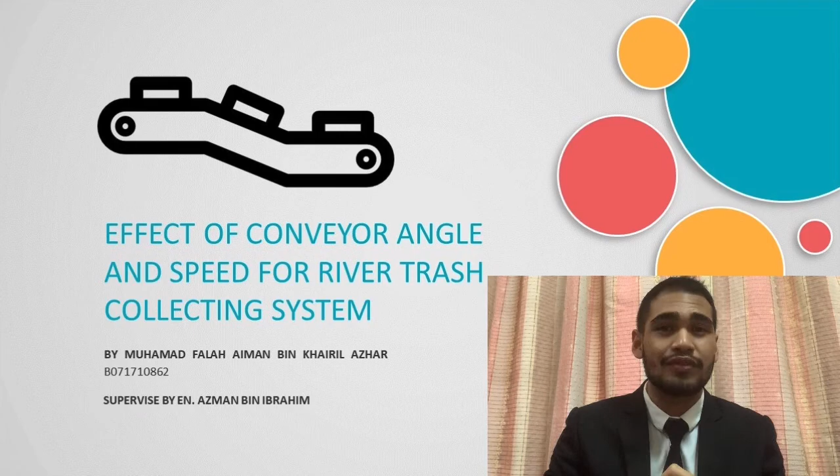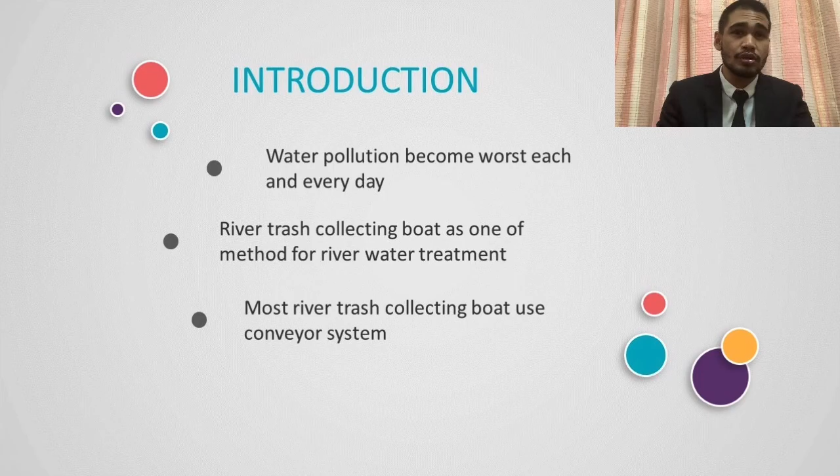I want to present my bachelor degree project entitled Effect of Conveyor Angle and Speed for River Trash Collecting System. As we know, water pollution becomes worse each and every day. So, in order to clean the water, the river trash collecting boat is used as one of the treatments for river cleaning. Most trash collecting boats use a conveyor system.

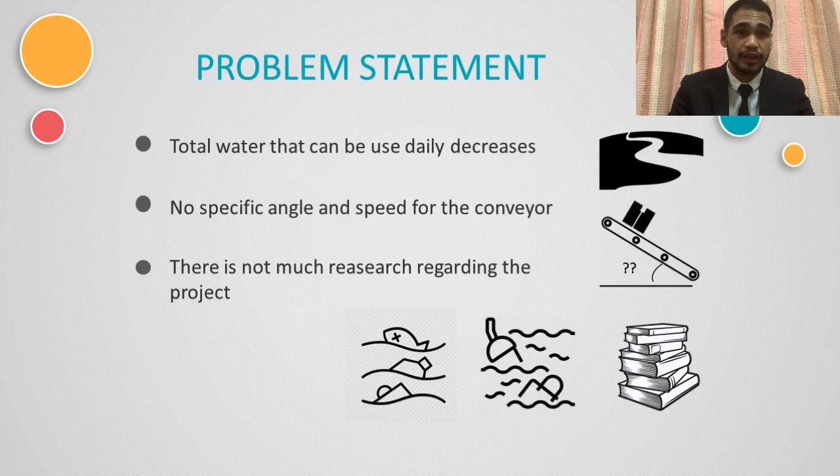My problem statement here is, there is no specific angle and speed of the conveyor used by river trash collecting boats. So, my objectives of study are to study the effect of conveyor angle and speed on the efficiency of collecting floating trash, to determine the specific angle and speed of the conveyor system in order to increase the efficiency of the system, and to design a conveyor system for river trash collecting.

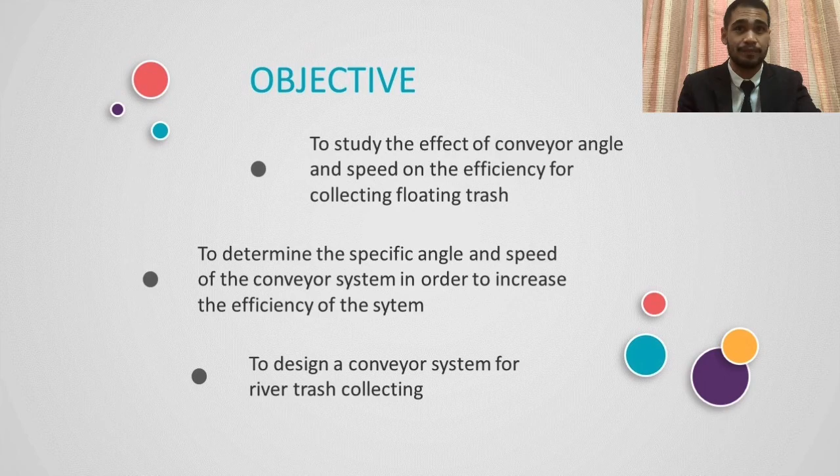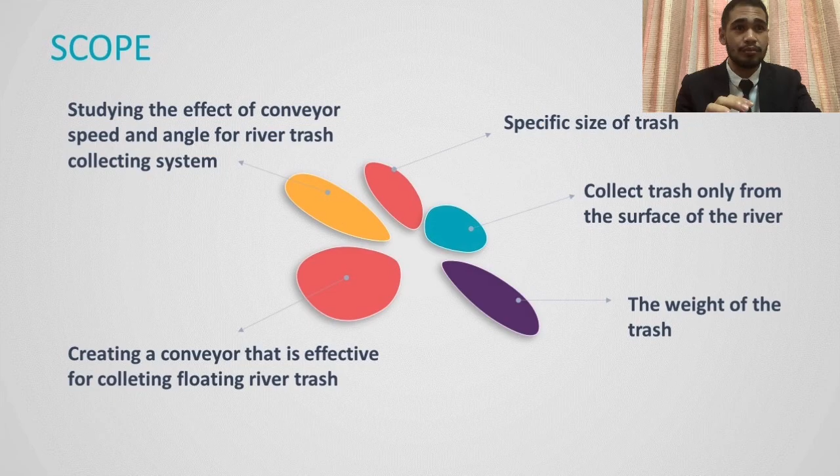My scope covers studying the effect of conveyor speed and angle for the river trash collecting system, creating a conveyor that is effective for collecting floating river trash, the specific size of the trash, collecting trash only from the surface of the river, and the weight of the trash.

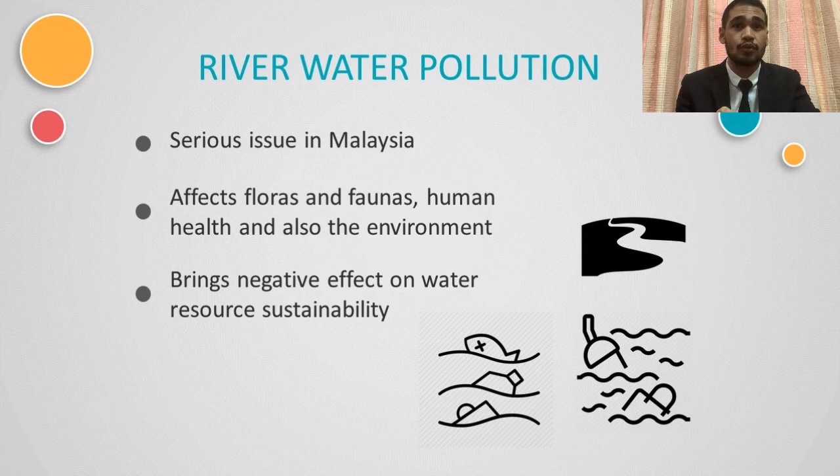For the literature review, river water pollution is a serious issue in Malaysia. It affects flora and fauna, human health and also the environment. It also brings negative effects on water resource sustainability. There are many current technologies for river trash collecting, such as the Water Witch Buddy catamaran, the trash wheel, the mud trash cat and the famous Interceptor.

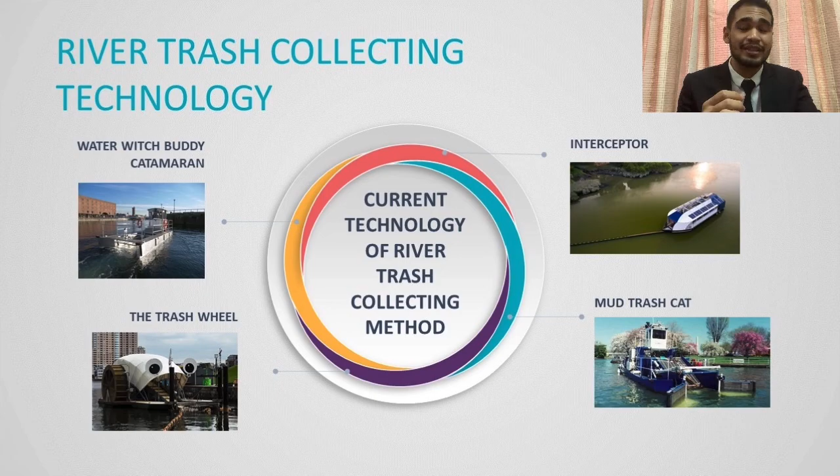Most river trash collecting boats use a conveyor. A conveyor is a mechanical component assembly that allows men to transport objects with minimal effort. It consists of a frame that supports the roller, wheel or belt from one destination to another. It is usually powered by a motor, gravitational force or manually according to the application.

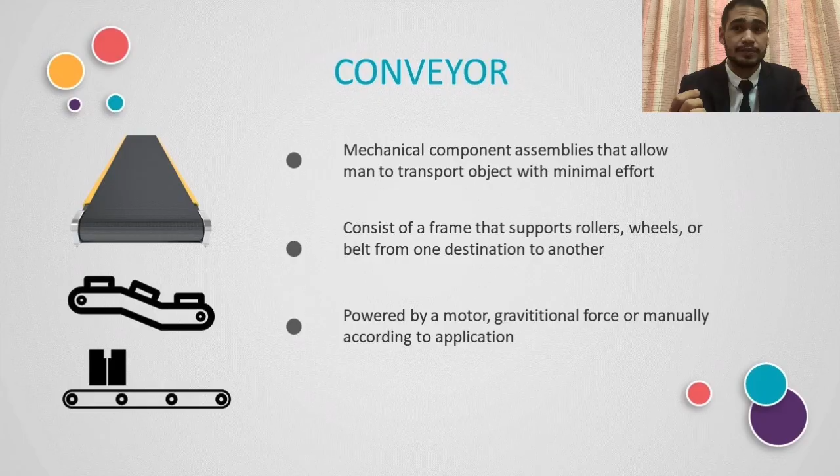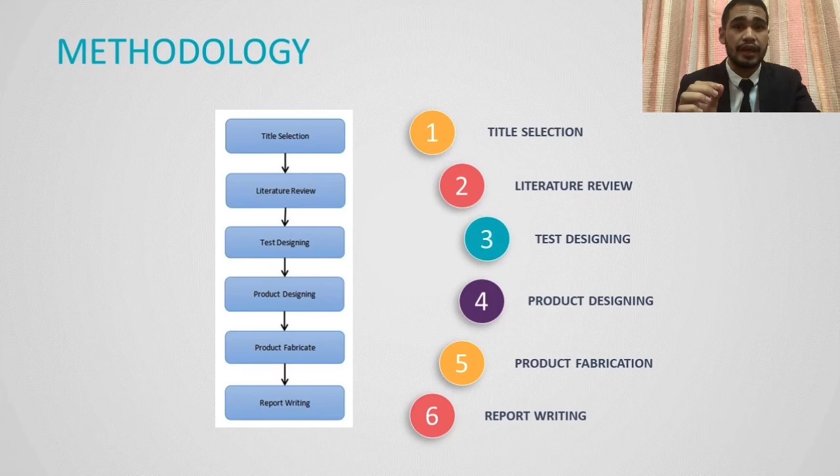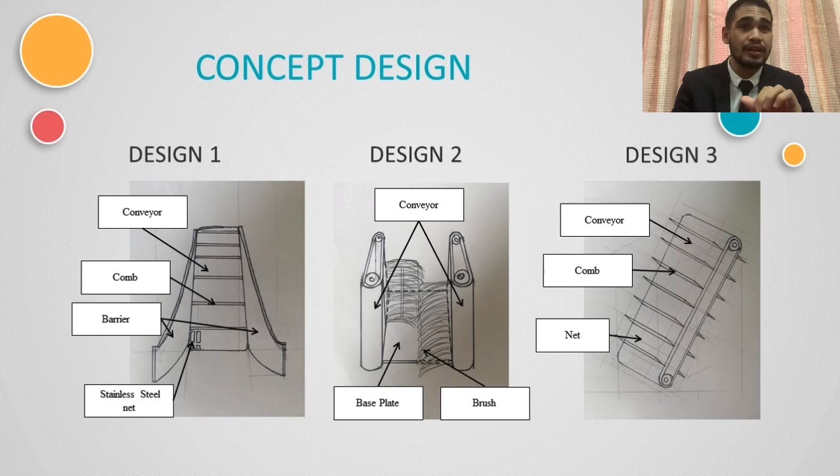For the methodology, first I did title selection, then the literature review, then design, product fabrication, and report writing. Here we can see there are three concept designs. The first design uses a conveyor, comb, barrier, and stainless steel net. The second design is a little bit different, using a brush as the method for collecting the trash. And the last design is conveyor, comb and net, which is just a raw conveyor.

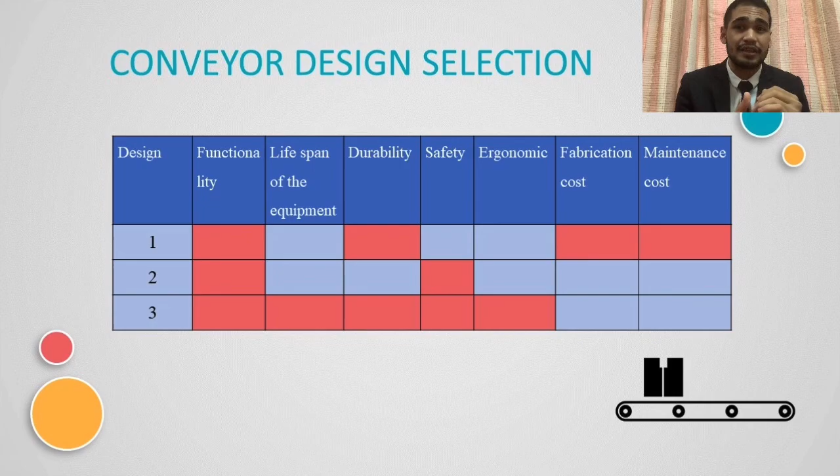For the design selection method, I chose a few criteria to choose the correct design for my conveyor: functionality, lifespan of the equipment, durability, safety of the conveyor, ergonomics, fabrication cost and maintenance cost. From the table, design 3 has more advantages than the other designs, so I chose design 3 as my conveyor design.

For the testing method, I use the conveyor and an angle adjuster rack to adjust the angle, and an aquarium wave maker to simulate the river current. The conveyor is put on the surface of the water, a few pieces of trash represented by mineral bottles are put in the water, the experiment is run, and we can see how many bottles the conveyor can collect in 15 minutes.

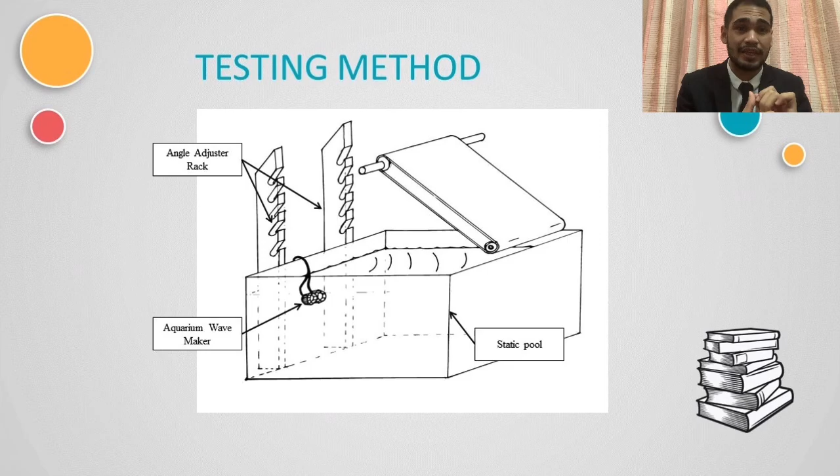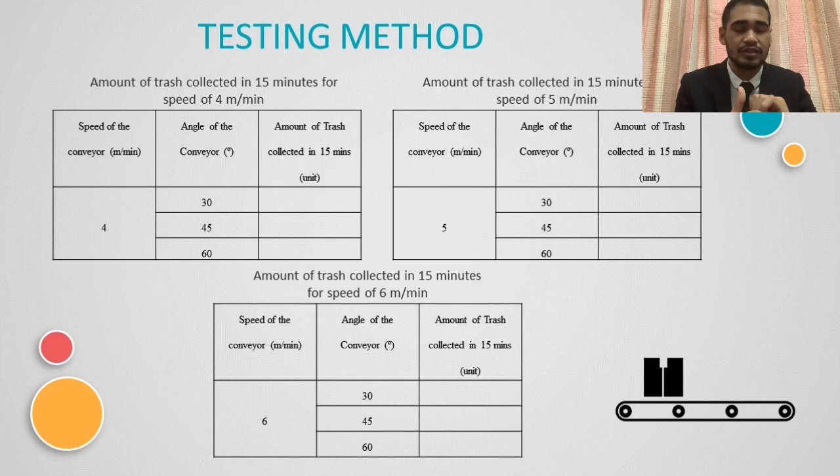Here is the table for each speed and angle. The first one is for speed 4 meters per minute, the second is 5 meters per minute, and the next is 6 meters per minute. All of them must collect the trash within 15 minutes. It is a fixed variable.

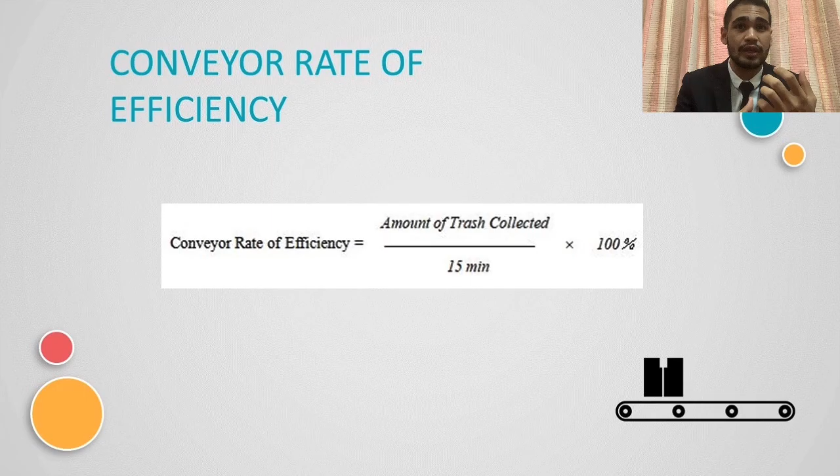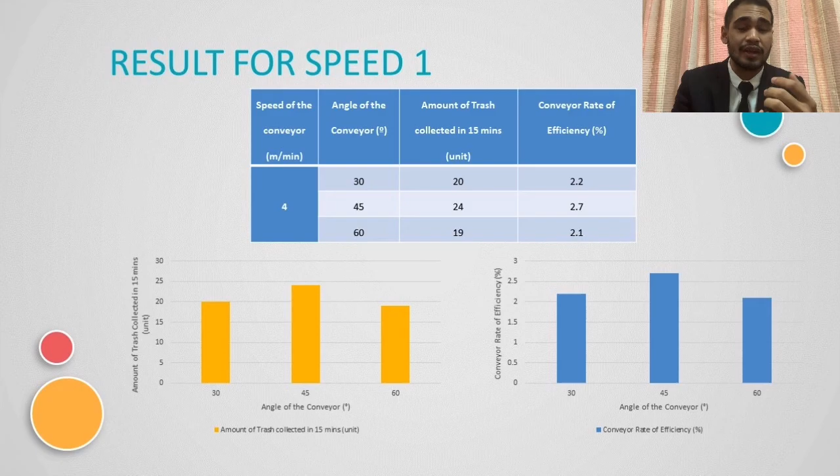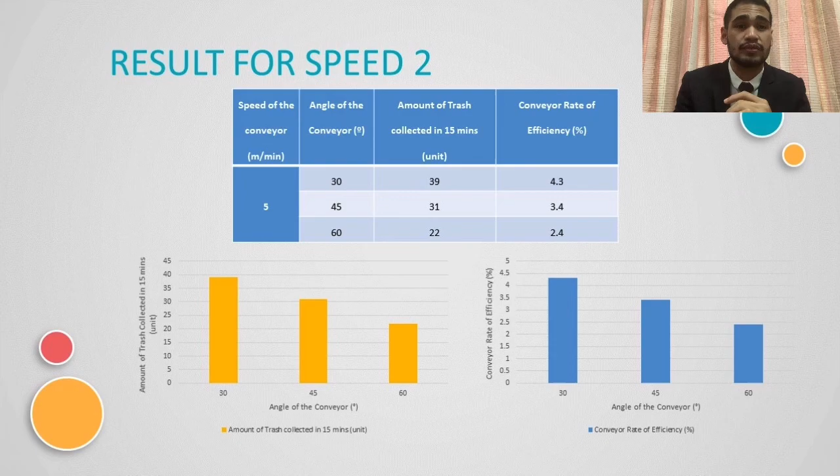So for the next speed, which is 5 meter per minute, for angle 30 degree, I got 39, which is the highest among the results, and conveyor rate of efficiency of 4.3%. And for 45 degree, I got 31 and 3.4 for the efficiency. And 60 degree, I got 22 amount of trash collected with 2.4% conveyor rate of efficiency.

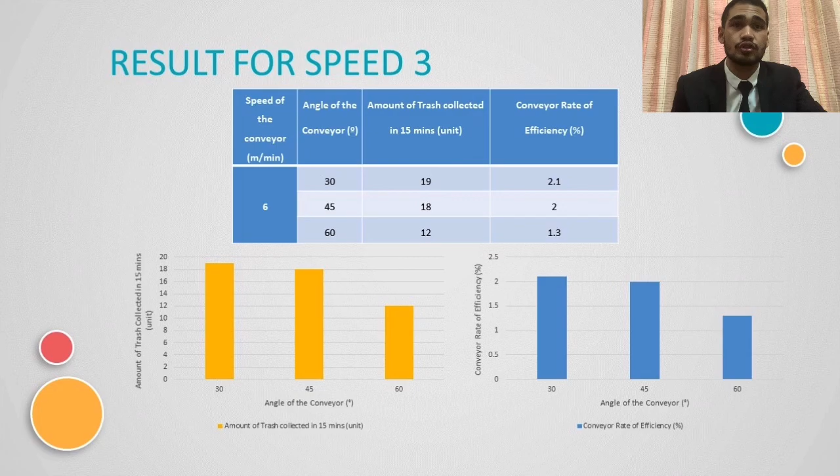Okay, for speed 3, which is 6 meter per minute, for angle 30 degree, I got 19 amount of trash collected, with rate of efficiency 2.1%. And for 45 degree, I got 18 bottles collected with 2% rate of efficiency. And for the last, 60 degree, I got 12 amount of bottles collected with 1.3% efficiency. So the 60 degree has the lowest conveyor rate of efficiency among the results.

So for the discussion, the first important factor is gravitational force. When the angle is higher, the gravitational force will be higher because the center of gravity of the conveyor will be higher. So it will make it harder for the conveyor to collect the trash, and it will cause the efficiency of the conveyor to be lower. Next is the conveyor load. Conveyor load also plays an important role, because the more the load, the heavier the conveyor to collect the trash.

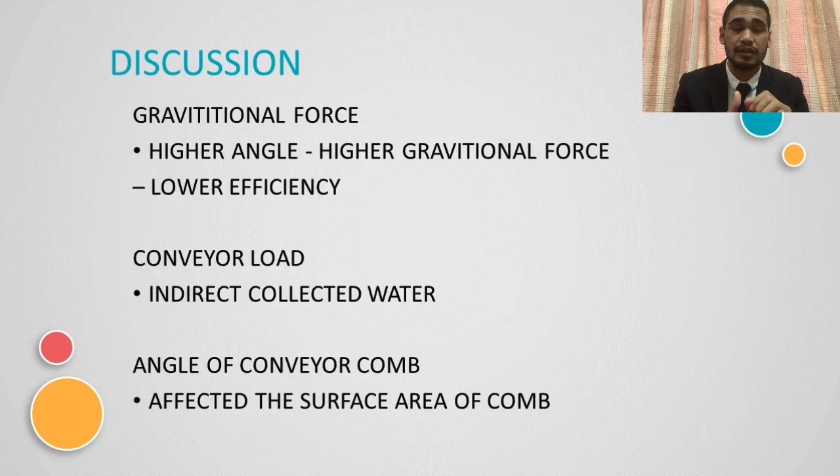So here I want to highlight indirect collected water. Indirect collected water is when the conveyor goes up, and then the water is indirectly collected because of the surface of the comb. So here the angle of the comb plays a vital role, because when the angle of the comb is steeper, is less gradient, the water will be attached strongly there at the comb of the conveyor, so the conveyor is heavier to pull out, affecting the efficiency of the conveyor also.

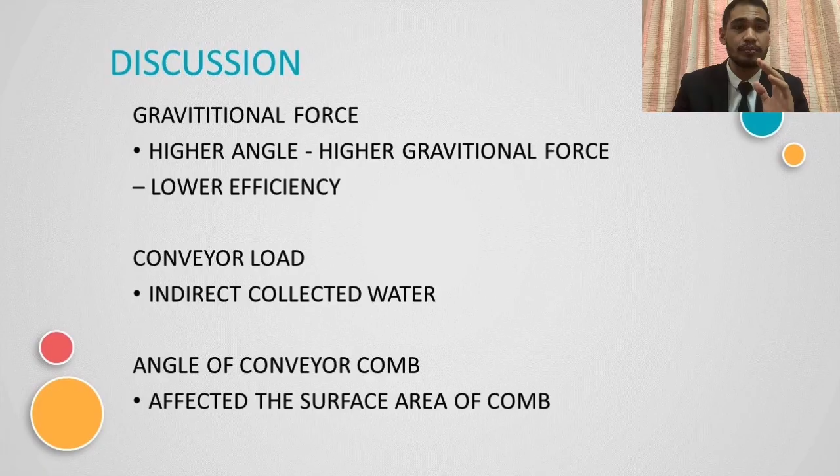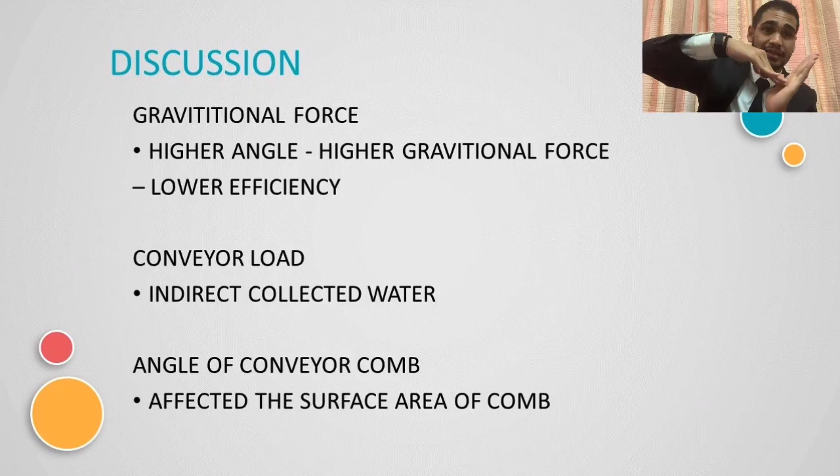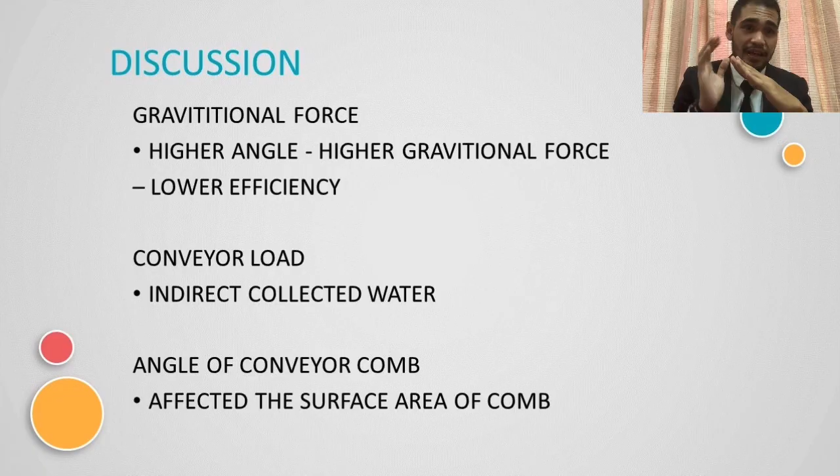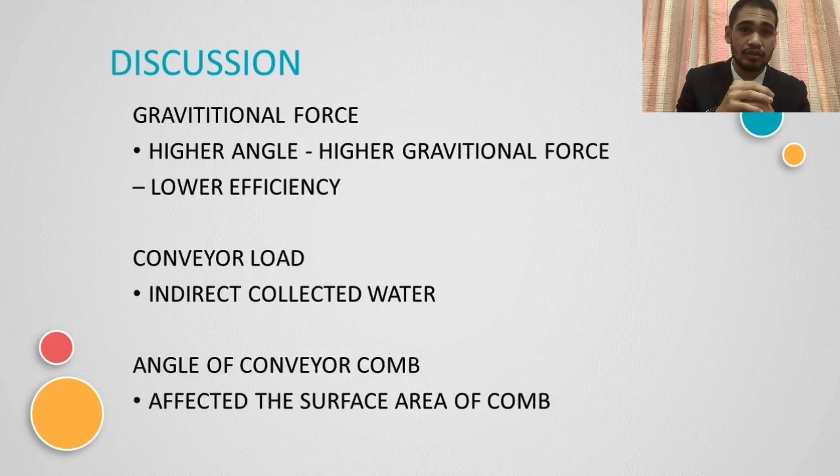And next is angle of the conveyor comb. So as you can see, I put the conveyor comb 90 degree to the conveyor, so it will be like this. When I put the conveyor to 60 degree, the conveyor comb will be 30 degree. So if the conveyor comb is steeper, the gradient is more, the angle is more, it will affect the surface area for the conveyor comb to attract the bottle, and the surface area will be lower. When the surface area is lower, the amount of trash collected on the surface area is lower also, which causes the rate of efficiency to be lower.

Okay, for conclusion and recommendation, the conclusion is, as we can see, the higher the angle of the conveyor, the lower the efficiency of the system. This is proved by the test that I've done. And next is the speed limit. The speed is limited to a range where the force of the conveyor to transport the trash is affected. So the speed cannot be too low and cannot be too high. It must be in between the range for the conveyor to collect the trash out.

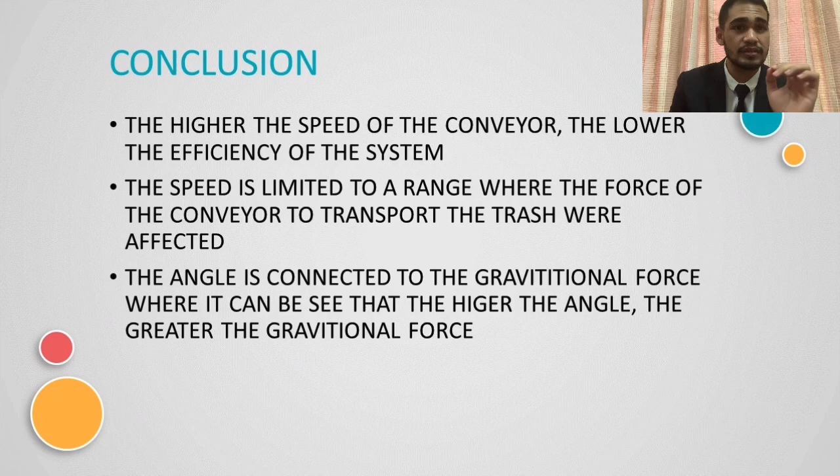And next, the angle is connected to the gravitational force, where it can be seen that the higher the angle, the greater the gravitational force. As we can see by my result above, the angle 60 degree has the lowest rate of efficiency. So for my recommendation, firstly, the usage of material for the conveyor net with less capability to absorb water. So for the next study, maybe we can use material that absorbs water less, so the conveyor will not have a heavier load.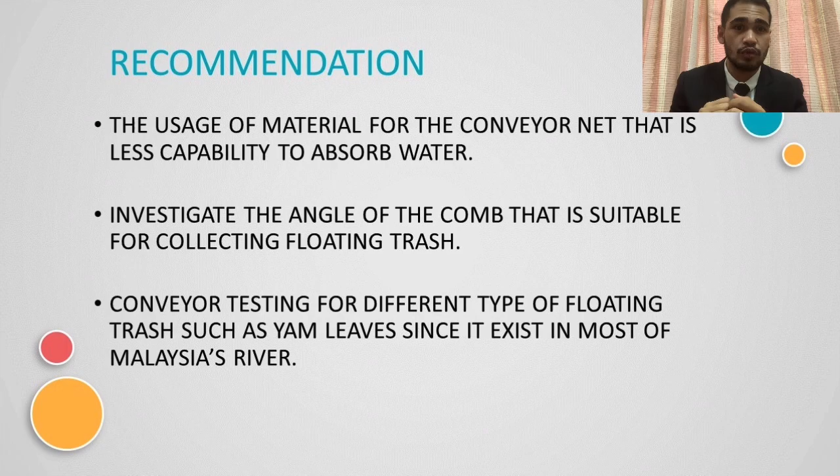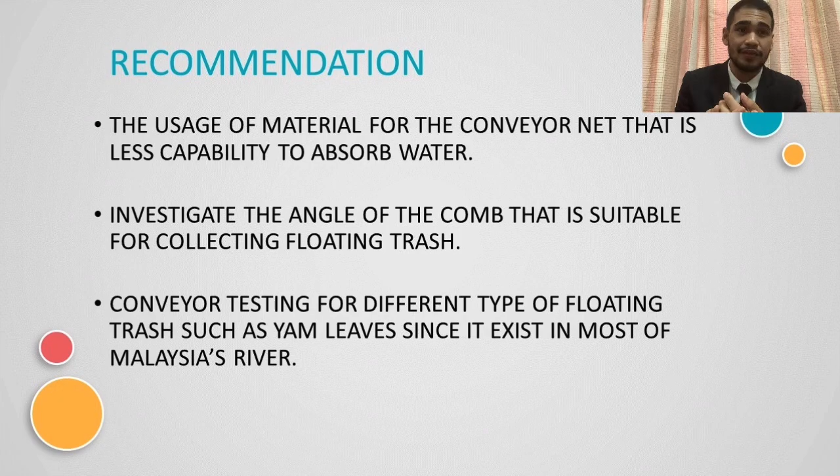And the second one is to investigate the angle of the comb that is suitable for collecting floating trash. My scope only covers the angle of the conveyor. As I did the test, I saw that the angle of the comb also plays an important role in collecting the trash. And the last one is conveyor testing for different types of floating trash, such as yam leaf, since it exists in most Malaysian rivers. So instead of just water bottles, for the next study, people can use yam leaves, plastic as a test. So that's all that I can conclude from my experiment, from my bachelor degree project.